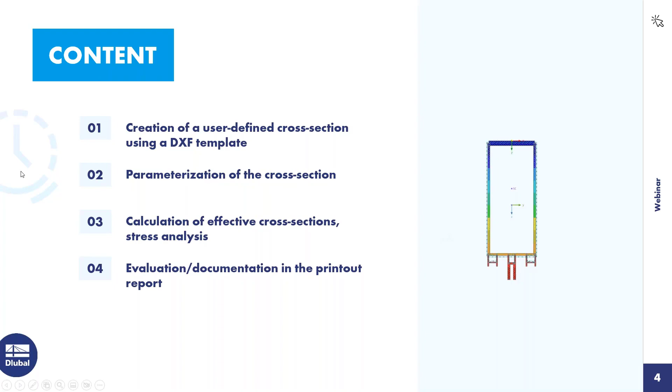The standalone program R Section determines the section properties for any thin-walled and massive cross-sections and performs a stress analysis. If you want to design special sections in RFEM or RStab that are not contained in the section library, you can create them with R Section.

You can then import these user-defined sections into RFEM or RStab.

Sections can be generated via graphical or tabular input, by importing a DXF file, or using a script. Furthermore, a parametric input is possible.

Today I will first show how to create a cross-section by importing a DXF file, and then I will parameterize the cross-section.

I import the DXF file via Import DXF. Here I have to choose the corresponding DXF file, and then I click on Open.

In this window I can specify the insertion point, or I can define a rotation, or it's also possible to do a system transformation.

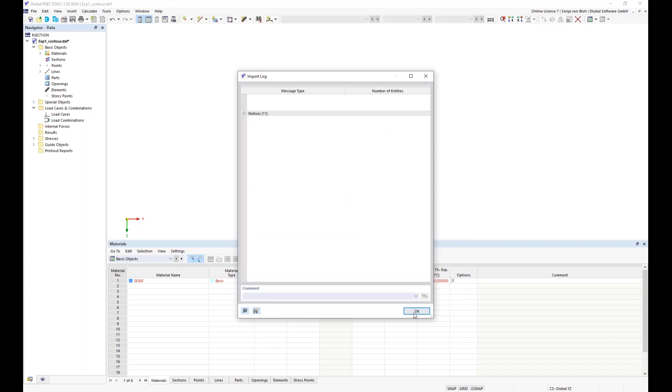And I click also OK, and then all lines will be imported.

Then I set the analysis method in the base data dialog. Here I open the base data dialog and I can choose the analysis method.

The following analysis methods are available: a finite element analysis and the thin-walled analysis.

The difference between the finite element calculation and the analysis of thin-walled structures is the calculation of the cross-section values and stresses on the gross cross-section. With the finite element calculation, the calculation is based on the FE method.

When analyzing thin-walled structures, the calculation is carried out analytically. The effective cross-section can be calculated for both analysis methods.

A license for the effective cross-section extension is required for this. The green dot here in front of the extension indicates that a license is present.

After activating the extension, a standard must be selected according to whose rules the subpanels are to be generated and the effective cross-section is to be calculated.

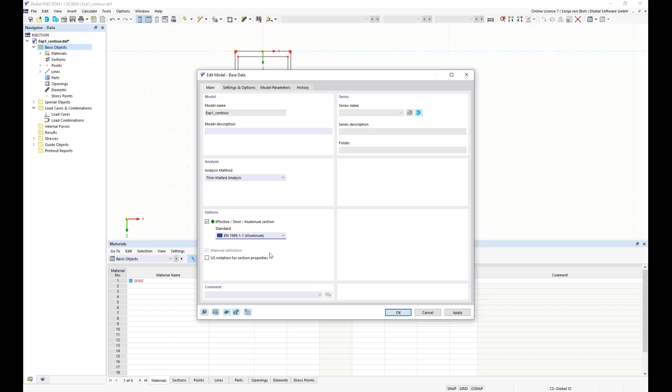I click here on OK, and then I have first to define the material. For this, I open the tree in the navigator: data, materials.

A material has already been created here. I double click this material to open the corresponding dialog.

I can create or copy another material on the list here on the left. These are the buttons for creation of a new material or copying the selected materials.

I can also delete the selected material. I can enter the name of the material directly in this box, and R Section then lists all materials that match that name.

If I enter the name here, you can see the corresponding materials.

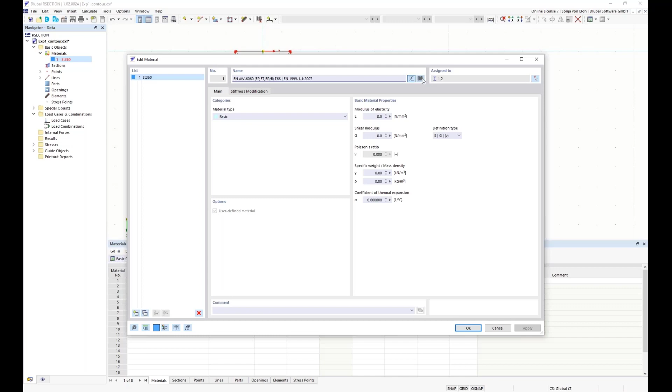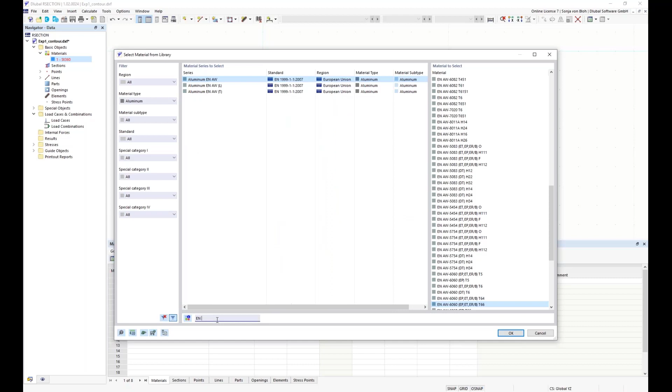I can also open the material library for a specific selection via this button. In the material library, filters are available to quickly find the material. I can choose the material type or subtype, the standard, and so on. But there's also a search available in this window. I can directly type in the name of the material.

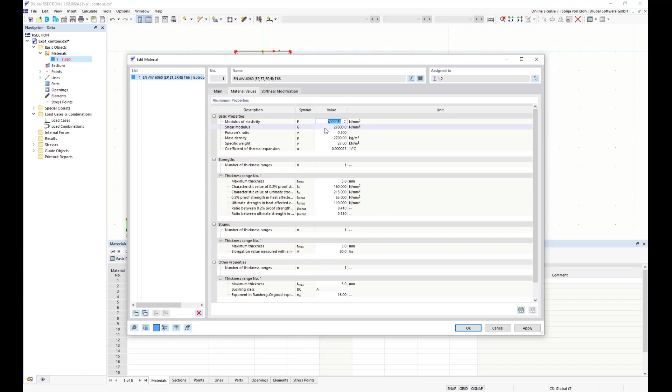I choose this material and click on OK. If the material is not in the material library, I can create it by activating this checkbox, user-defined material. If I now go to the tab material values, I can define the properties I want. I don't want to do this, so I uncheck this checkbox and click on OK.

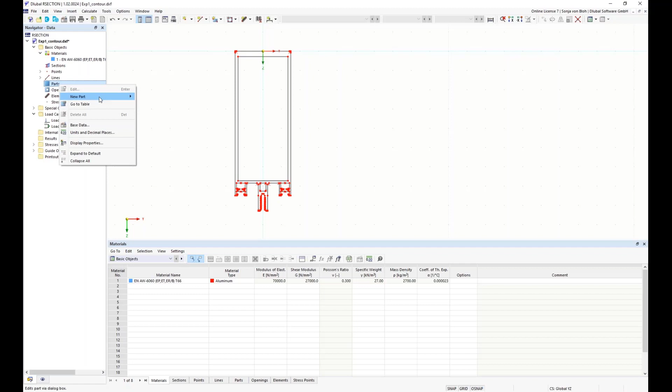After defining the material, a part must be defined for the cross-section. This part must be defined for all analysis methods. I create this part by selecting the boundary lines. For this, I go to the navigator data, then to a new part, boundary lines. Then I pick all lines, and then I want to deselect the openings.

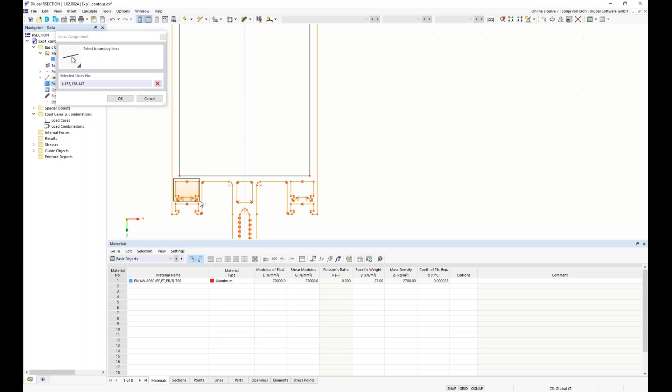I hold down the Shift key for this, and then I select the lines that I want to deselect. Then I click on OK. The material has already been defined here. Then I click on OK.

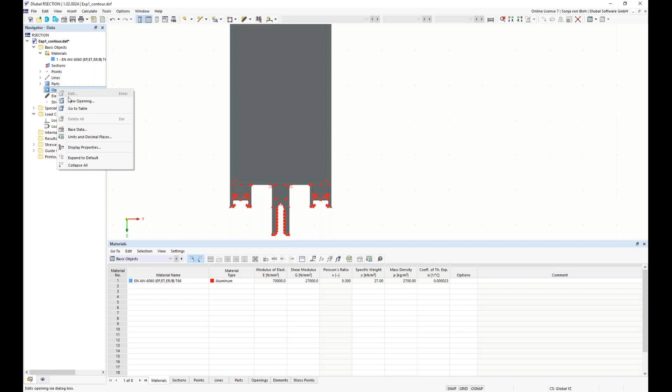After creating the part, I still need to create the openings. I will do this via the navigator data. For this, I right-click on openings and choose New Opening, and then I select the boundary lines.

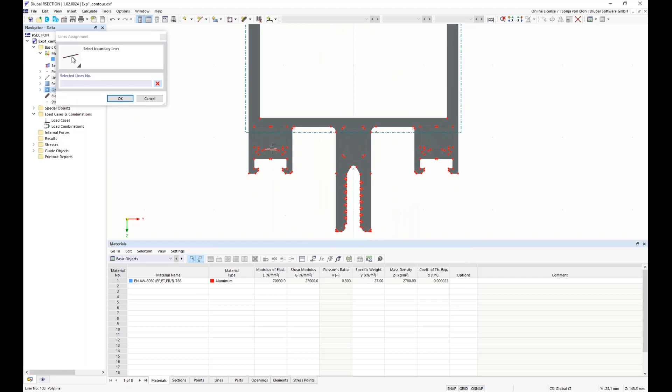I click on Apply and Next. Then I select the next boundary lines. Apply and Next. Next boundary lines, Apply and Next. And the last opening. Then I click on OK.

For calculation of the gross cross-sectional values using the finite element method, my entries would now be complete. However, I want to make a classification and calculate the effective cross-section, so I also need to define elements. The definition of elements is necessary since the subpanels are only available here. The definition is also necessary for the calculation with the analysis method thin-walled analysis.

Based on the elements, some cross-section values such as torsional moment of inertia and warping resistance are calculated if the analysis method thin-walled structures is selected. If finite element analysis is set, the gross cross-section values are calculated using the FE method.

The subpanels are automatically generated based on the standard selected in the base data dialog. These cannot be changed. If no elements are defined, a cross-section classification in RSECTION and the design models of RFEM or RStab is not possible, and it's also not possible to calculate the effective cross-section. In the design add-ons of RFEM or RStab, this cross-section is then designed according to cross-section class 3.

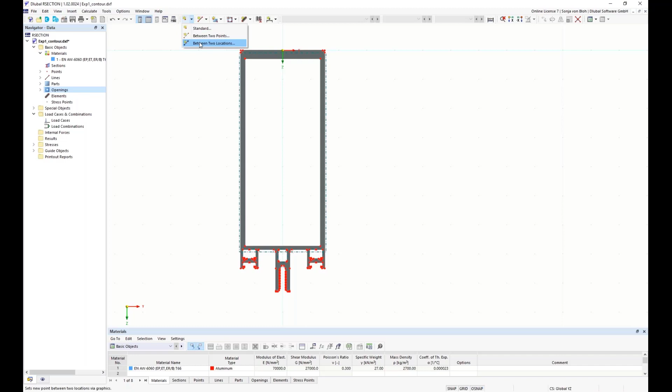I can now graphically create the start and end points of the elements, for example, using the function between two locations. For this, I select the first point and then the next point, and then I can define the distance between the two points. I don't want to do this today.

Because it's also a good idea to create the center lines in the CAD application and import them as a background layer. In contrast to the DXF import, in which the complete model is imported and converted into points and lines, the background layers represent a kind of layer for modeling.

For this, I open in Navigator Data the background layers. Here, a background layer is already imported. I delete this because I don't need it today. Then I go here to new background layer.

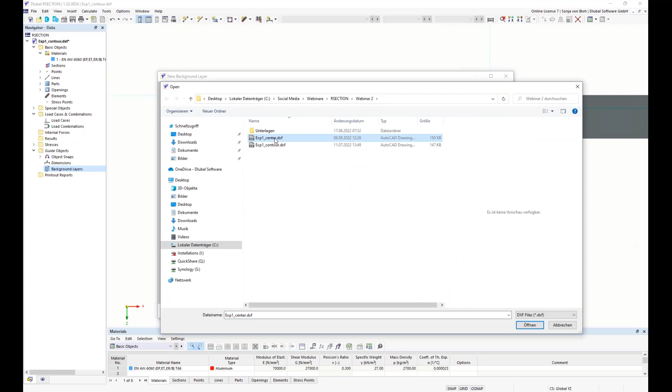Here I first select the DXF file to be imported via this button, Open File, and I choose the DXF file with the center lines. Then I click on Open, and the insertion point, this point here, determines where on the envelope of the background layer is placed at the origin point.

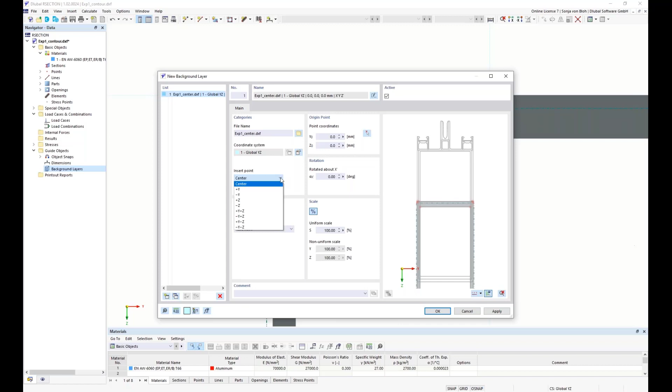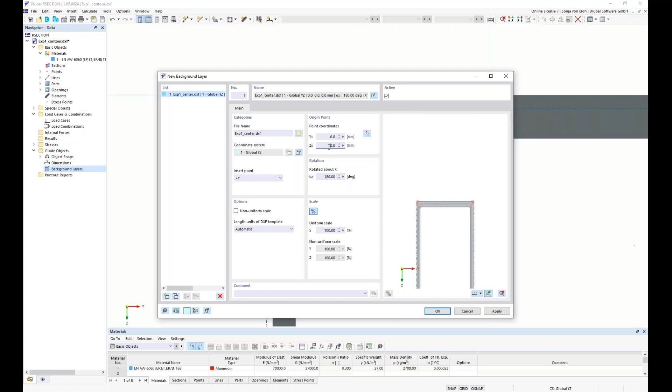I choose +Y here. Furthermore, I leave the origin at the 0 point here, and I define a rotation about 180 degrees. I see the result in the graphic here on the right, and then I click on OK.

Now the background layer is imported. Then I go to Object Snaps, and I want to control which options are activated. Here the options points, center lines, and focuses are activated. Points is already activated here, so that the start and end points of the center lines of the background layers are snapped. This is this checkbox.

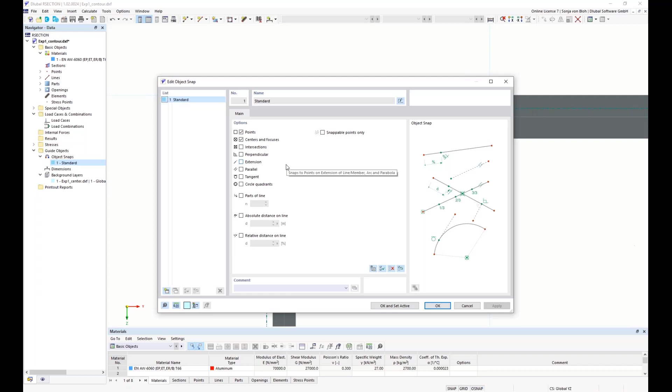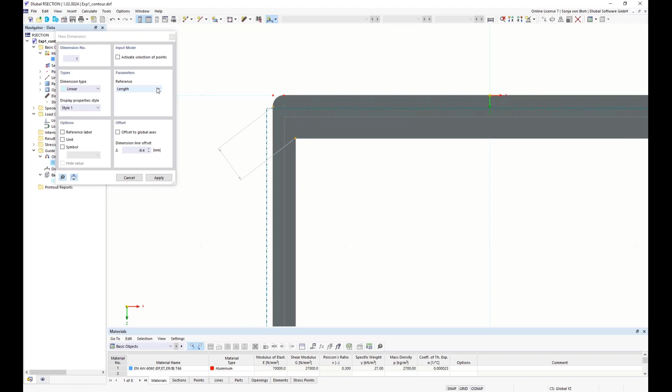I now dimension the cross-section to determine the element thicknesses. I can do this via the symbols here. We have several possibilities - I can do a linear dimension, arc length dimension, and so on. I choose here the linear dimension, and then I have to click or pick the points where I want to create the dimensions.

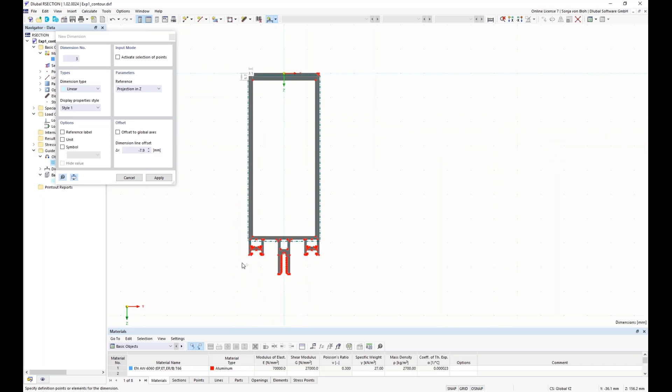I have to change the reference here to the Y direction, and I do this also here for the flange projection in Z direction. I need this also here, and the dimensions here.

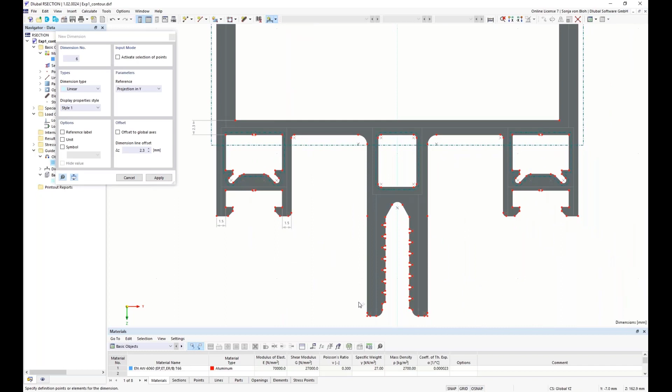And the dimensions here. I want to know which thickness is between the center point of the arc and this point here. For this, I create a help node. And then it's possible to make a dimension here.

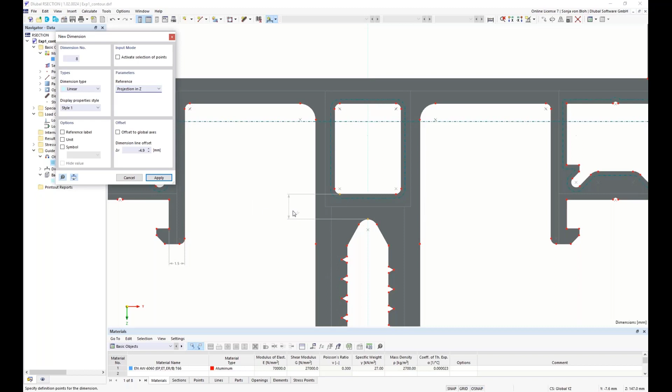I think now I have all thicknesses so that I can create the elements. The elements can be created graphically or via a dialog. The graphical input is called up via the symbol in the toolbar here. Here I have the possibility to define a single element, arc, or circle. The input via dialog is called up via the navigator data here, new element, single line, etc.

When creating an element via the graphical input, the part is also created. If an element is created in an already existing part, this part will be extended if necessary. When creating an element via the dialog, the part and the points of the element must be created beforehand.

Elements must be connected for the calculation of the effective cross-section. The connection is to be made via the start and end points of the elements. If two elements share the same points, they are connected.

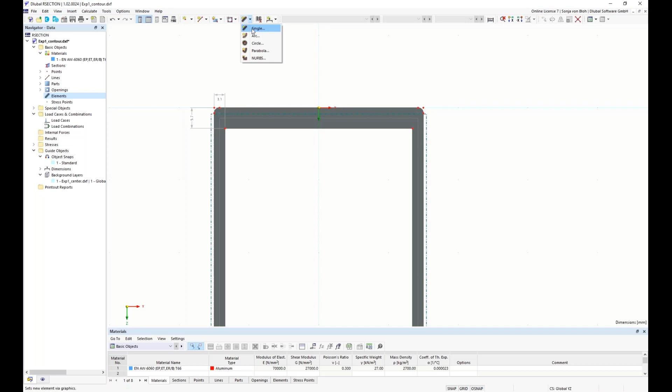I now define the elements via the graphical input, so I choose here this function single. Then I define the thickness 5.7 millimeters, and I pick the points on my background layer.

Then I define the elements for the web. The web has a thickness of 3.1 millimeter. Same on the other side.

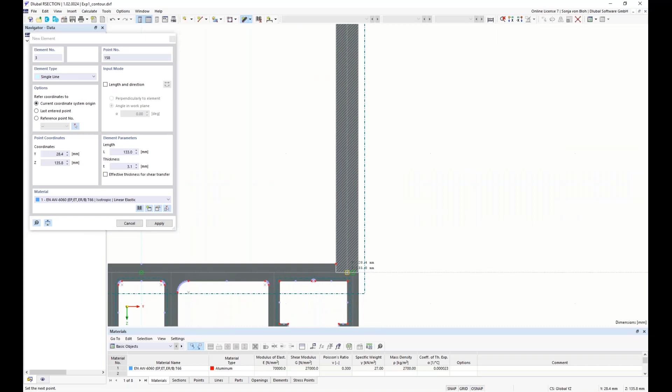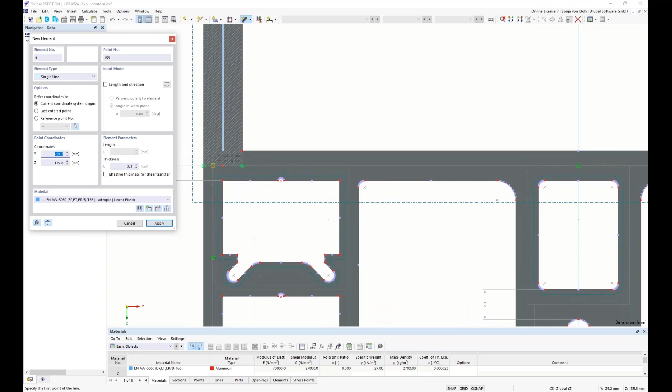Then I define the elements here on the flange. They have a thickness of 2.3 millimeters. I pick the corresponding points.

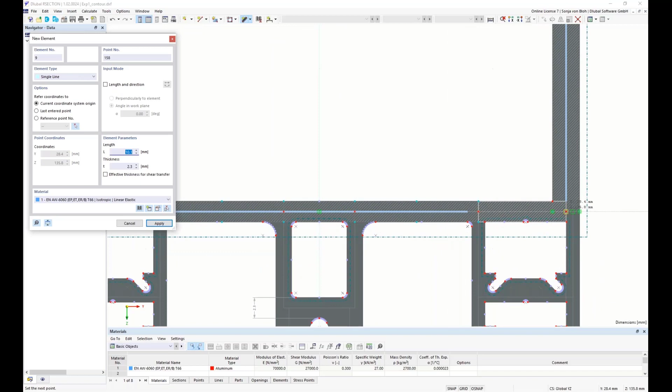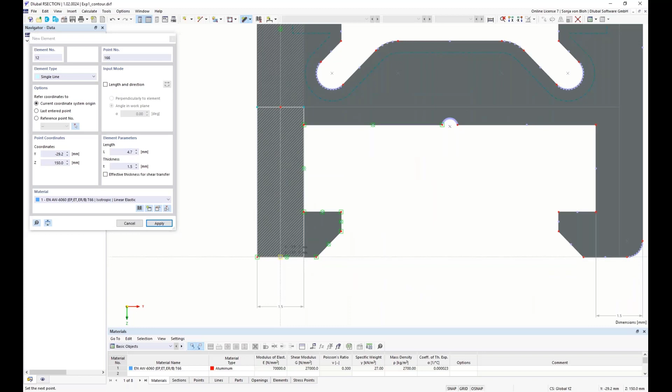Then I have to create the elements here. They have a thickness of 1.5 millimeter. Same on the right side of the cross section.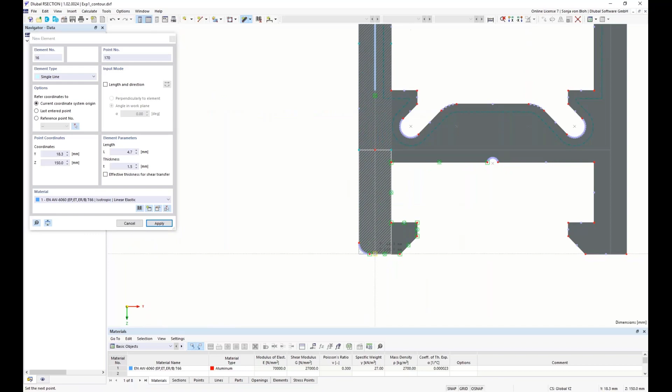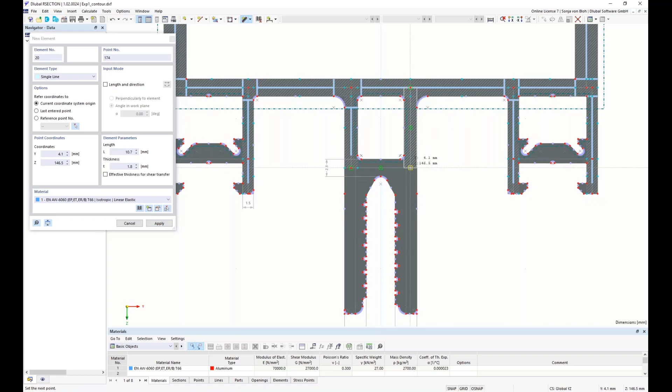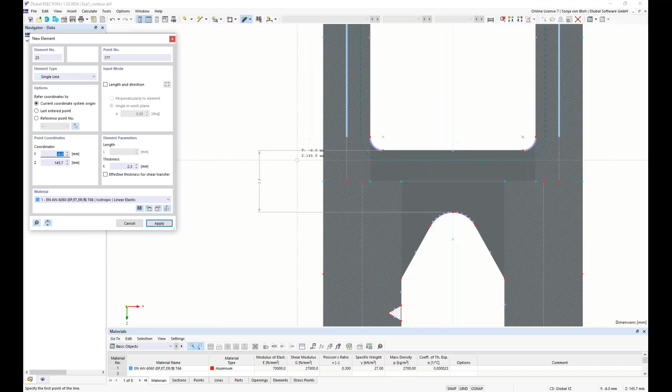Then I create the elements here in the middle. Then the connecting element here. And then the elements here.

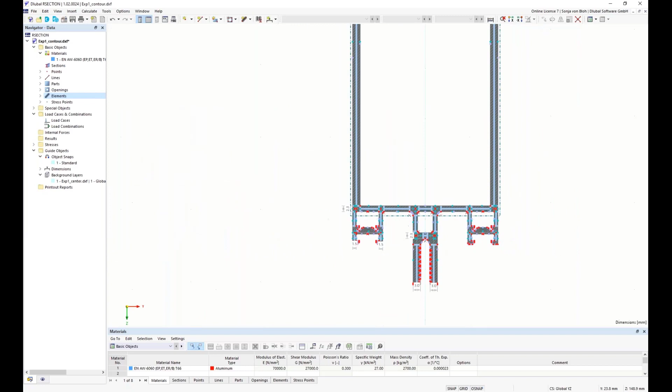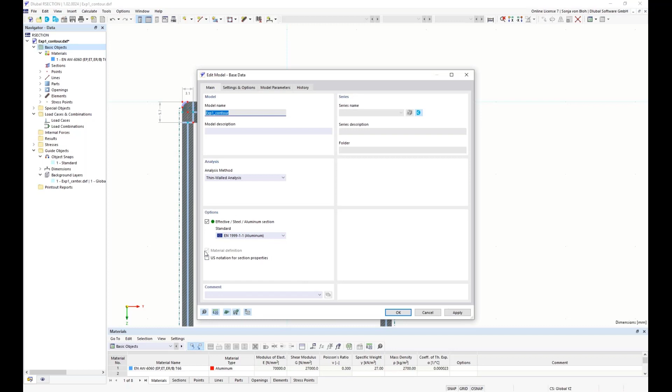The cross section is now complete. You can see the subpanels here that were automatically generated according to the rules of the standard that I have chosen in the base data dialog. Here it's a standard Eurocode 9.

If this cross section is available in different dimensions, a parametric input is recommended. The parameterized input makes it possible to enter model data and internal forces in such a way that they depend on certain variables. These variables, such as length, width, or thickness, are called parameters.

The cross section is in different heights, so I want to parameterize the height. The parameters can be defined in the global parameters, and I can open the dialog via the table, here clicking on the symbol edit global parameters.

First, I have to specify the name of the parameter in this cell. The name of a parameter must consist of ASCII characters and no spaces. The parameter is addressed in the formulas via the name, and each name may only be assigned once.

I create a parameter called h1. This is for the height of the cross section. Then I have to define the unit group, and the unit group of the parameter determines whether the parameter represents a length, thickness, angle, etc.

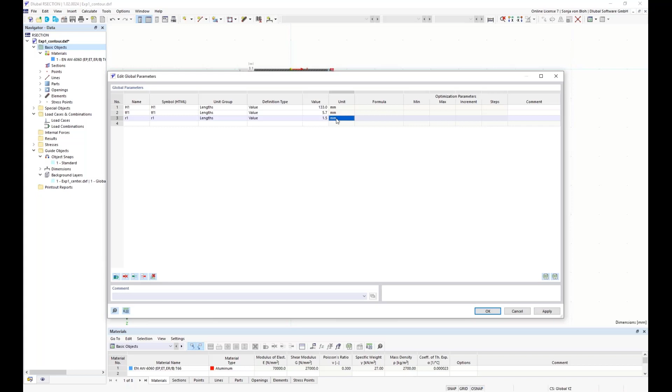Then I define the next parameter for the flange thickness. I call this parameter TF1, and I define the value 5.7 millimeters for it. Then I define the next parameter. I call it R1. This is for the radius, and I define the value 1.5 millimeter. Okay. Then I click on OK.

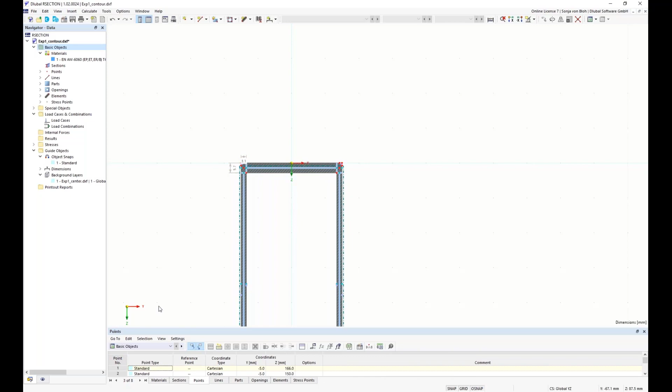I then define the coordinates of the top area using my parameters. The top area is this here. And for this, I go to the table points.

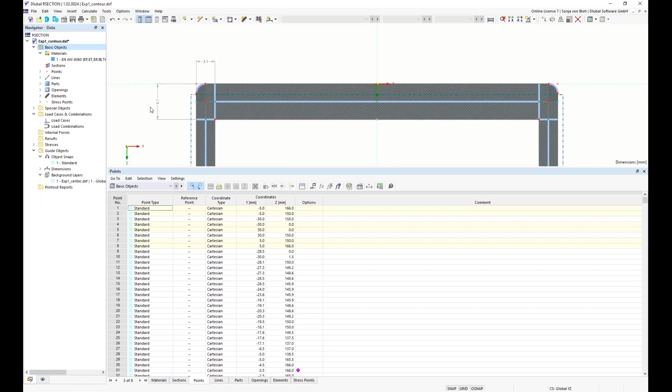I see here I don't need this point. This point is not needed, so I can delete them. I go to Edit, select 3 points, and then I click on Delete.

And now I want to parameterize all these points, so I select them, and then I go to this table function selected objects only, so that only my selected objects will be displayed.

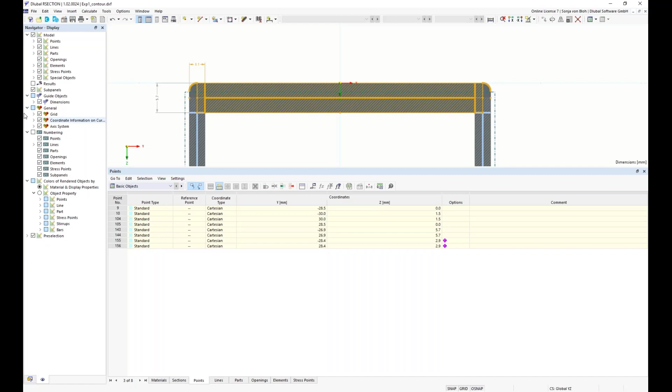I turn on also the numeration, or the numbering, of the points.

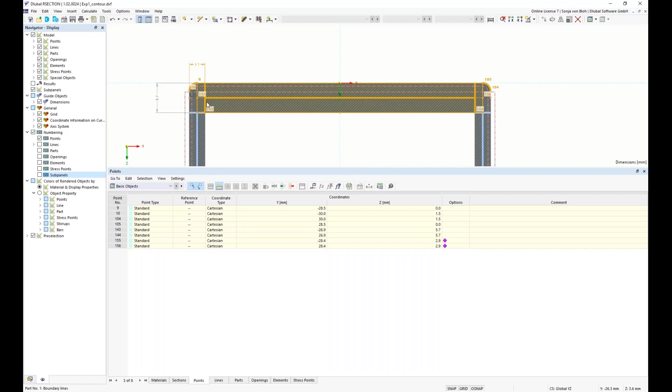And you have the option of addressing objects and their properties directly. For example, I can access the coordinates of points. If I want to access the coordinate of the point here, of the point 157, then I have to define this via the properties.

A list of the properties can be opened via the menu View and then Console. And then here, if I click on the info button, then I see all object properties. Here I have the object property points, and the property coordinate 1 is for the y coordinate of the point, and the point I have to specify in these brackets. The coordinate 2 is for the z coordinate of the points that I have to specify in these brackets.

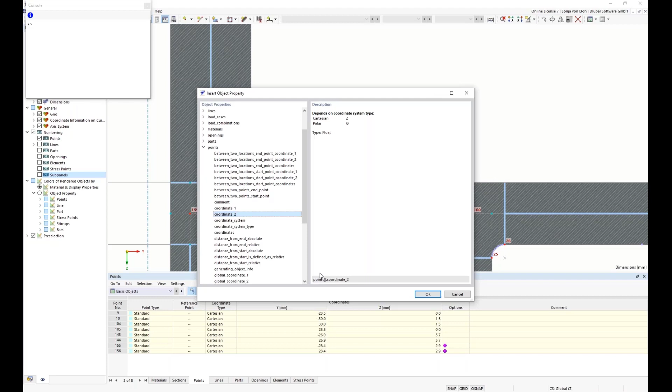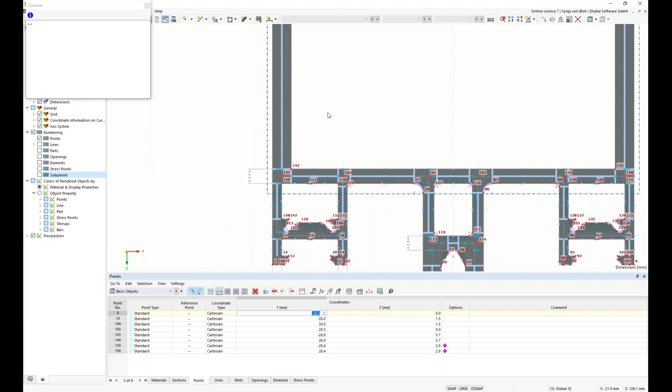I now define the coordinates depending on my parameters. I can do this directly in the table. For this, I want to define the y-coordinate of my point number 9. This is my point number 9. I type in equal points 10 dot coordinate 1, so it's the y-coordinate of my point number 10, plus my global parameter R1 for the radius.

I can show the formulas via this button, and it's also possible to define the parameters or the formulas in an additional window, in the Edit Formula window.

Here I define the z-coordinate of my point number 9. This is the z-coordinate of my point number 157. So points 157 dot coordinate 2, for the z-coordinate, minus H1 minus TF1 divided by 2.

Here I see the result. Then I click on OK. It's also possible to copy the formula.

So I open the dialog again, and then I copy this formula because I need it for the definition of my point number 10. For this, I open the Edit Formula window again. Then I paste this formula, and it's the same, but additionally plus R1.

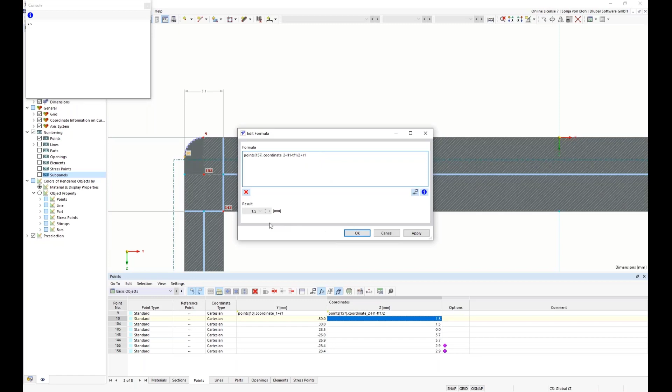Then I define the z-coordinate of my point number 104. For this, I open the Edit Formula window again, and this is also plus R1.

I do the same for point number 105. This is the y-coordinate from my point 104, minus R1.

And this is points 157, the z-coordinate minus H1 minus TF1 divided by 2.

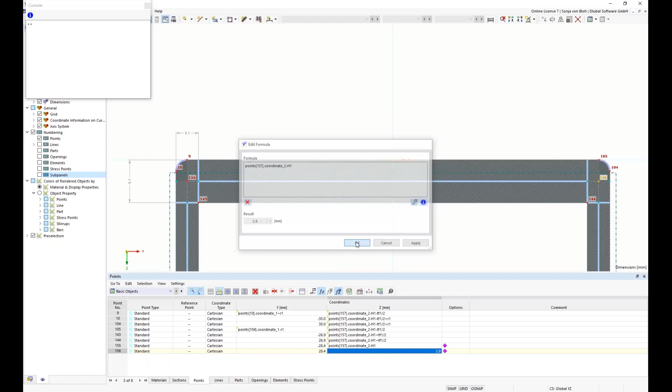Now I have to parametrically define the control points of my arcs, these arcs here on the left and on the right. For this, I open the Edit Line dialog via double-clicking on the arc, and then I can define the control point.

For this, I open the Edit Formula window of the y-coordinate of my control point. Here it's points 9, coordinate 1, minus R1 divided by square root of 2.

I copy this formula, click on OK. Then I have to define the Z coordinate. For this, I open the Edit Formula dialog again. This is the Z coordinate of points 10, so I have to change it here: Z coordinate minus R1 divided by square root 2.

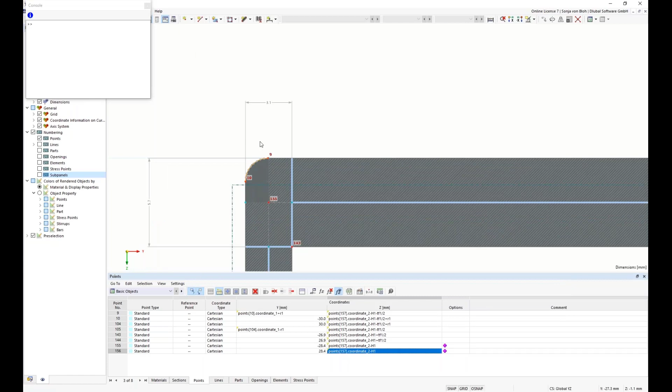I have to do the same for the arc on the right side. So I double click on this line, open the Edit Formula dialog, and I paste the formula. It's the y-coordinate of point number 105 plus R1 divided by square root 2.

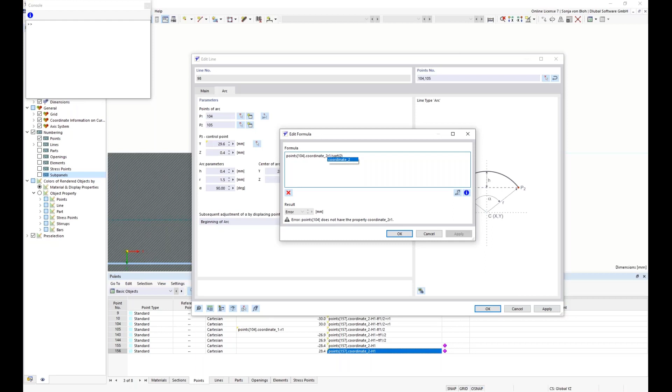And this is the Z coordinate of point 104 minus R1. Then I click on OK.

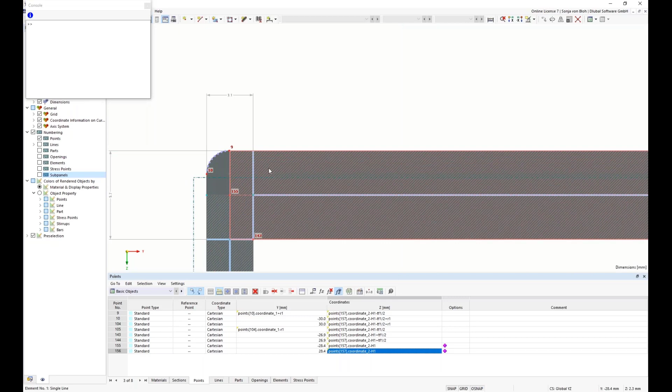The thickness of the element must also be defined with a parameter. So I open the Edit Element dialog, and here I define the parameter for the thickness. For this, I open the Edit Formula window again and define here TF1.

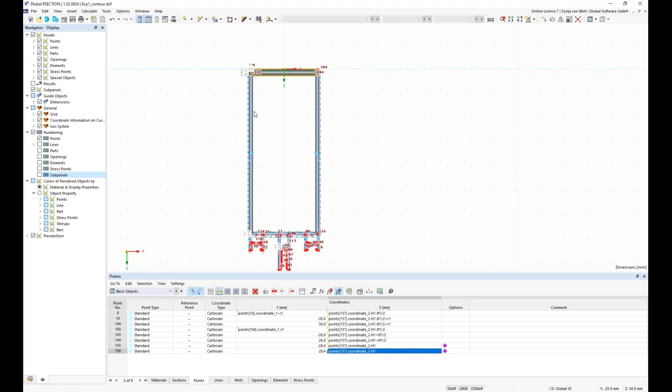Now I've defined all parameters, and for control purposes, I measure the height. For this, I create a linear dimension between the points 155 and 157.

You can also add a dimension symbol if you activate the checkbox symbol, and you can also use HTML commands and special characters called entities. A subscript is achieved with a sub-text tag. So if I want to define H and then 1 in subscript, it's sub, 1, and then the end tag.

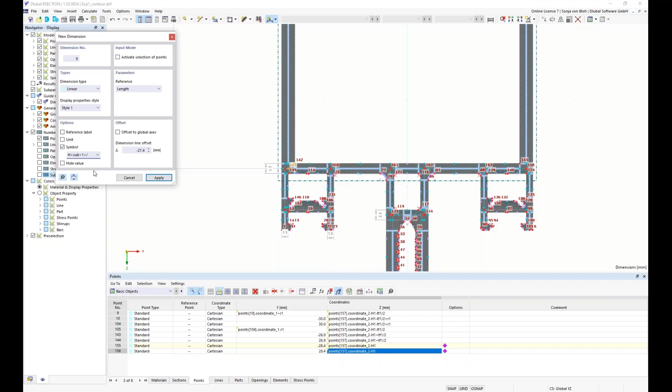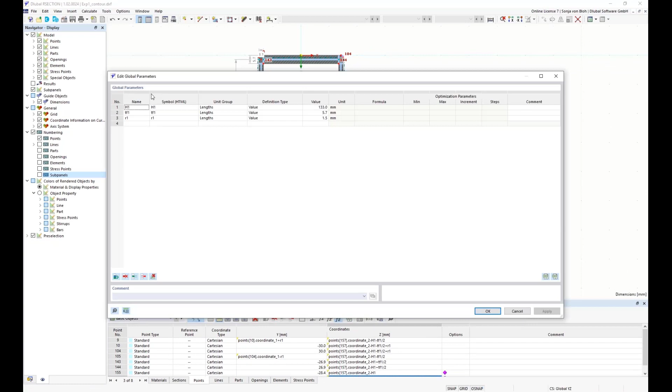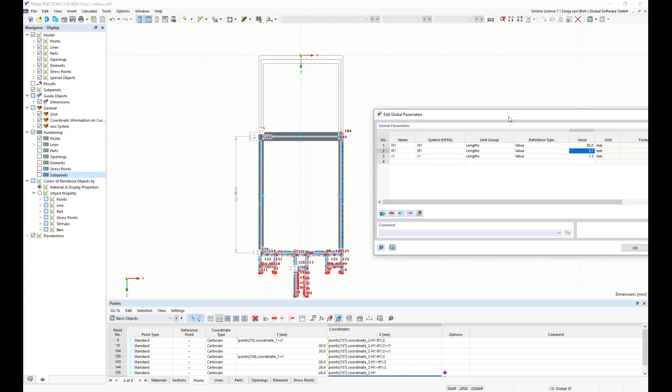Then I will show you the parameterization. For this, I change my parameters. Maybe here I change the height H1 to 80 millimeters, and if I click on apply, you can see the result. I change it back to 133 millimeters and click on OK.

I would also like to use this example to show you how to calculate stresses on the effective cross-section. In order to calculate stresses on the effective cross-section, a load case must be created first. A load combination can also be created.

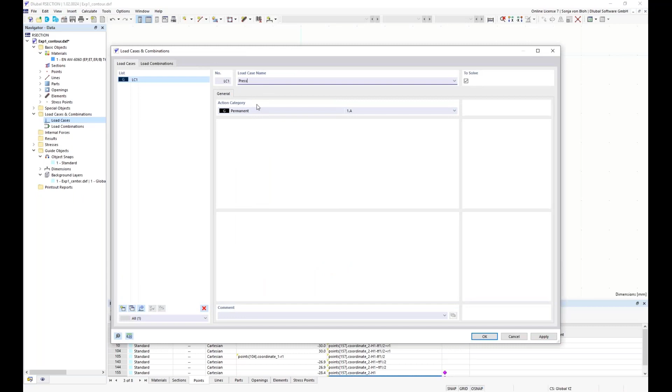I create a load case via the navigator data. For this, I right-click on the load case and choose new load case. I define the name pressure, and then I click on OK.

Then I have to define internal forces. I can do this via the navigator data, or via the table. If I choose internal forces here, it's possible to define them manually. It's also possible to import the internal forces from RFEM or RStab via this button. Only import from RStab 9 or RFEM 6 is possible, and the file must be saved with results for this.

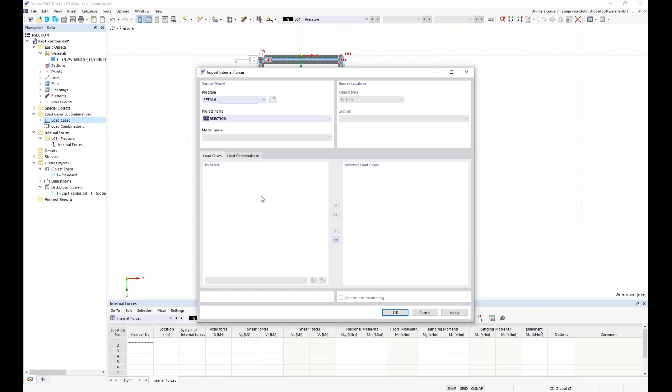A load combination is supported as a load case. I don't want to import internal forces today from RStab or RFEM, I want to define them manually in the table. For this, I have to enter the member number and the location, and then I define an axial force, pressure minus 2 kilonewton.

In the base data, I can make detailed settings. So I open the base data dialog again, and then I go to the tab settings and options. Here I can define if the stresses for elements should be determined at the most unfavorable element edges or on element center lines only.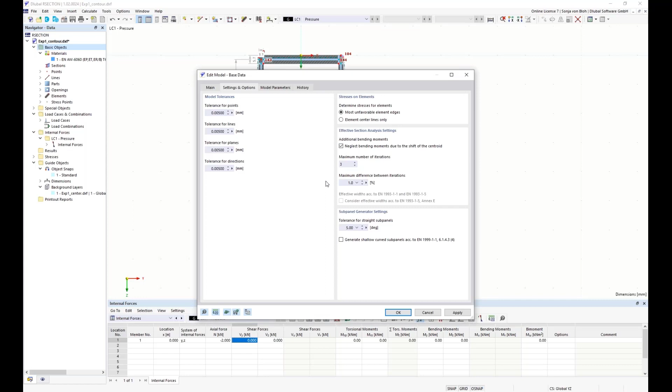Here it's also possible that an additional acting bending moment, that results from the shift of the centroid of the effective cross-section relative to the centroid of the cross-section, should be neglected. So I activate this checkbox, and then I click on OK.

Which stresses are to be calculated and output in tabular and graphical form can be set in the data navigator. Here under stresses, stress configuration, I open the corresponding window, and here you can activate or deactivate the stresses that should be calculated. Here the stresses sigma x total and tau total are activated.

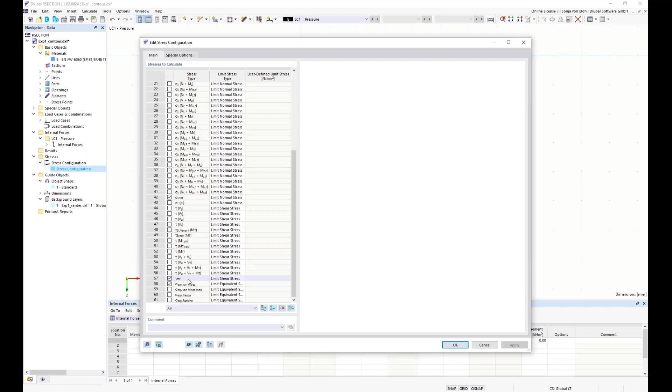This is okay, and then click on OK. Then I'll start the calculation now. So I go to calculate, calculate all.

And in the table, you have the results for the gross cross-section. This is the thin-walled analysis, the sectional area for the gross cross-section, and you can switch here to the effective thin-walled analysis. Then the sectional area of the effective cross-section will be displayed. This is less than the gross cross-section, so I assume this cross-section has class 4.

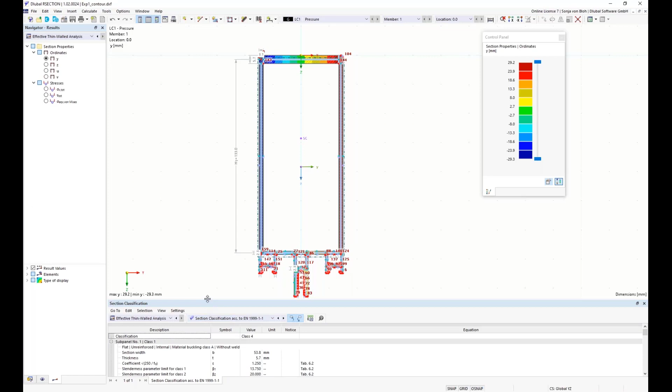You can see this also in additional tables. Here you can choose the section classification, and I can see, okay, this is class 4, and the subpanel number 2 is class 4. This is also selected here in the graphic.

I can switch also the graphical results to a thin-walled analysis. This is for the gross cross section here, sigma x total, and I can see here also the effective cross section, and I can see, okay, the web is reduced, and if I want to know the reduction, then I can go to the corresponding table.

Here, reduced thicknesses. I click on the corresponding subpanel, and I see the effective thickness is here 2.4 millimeters.

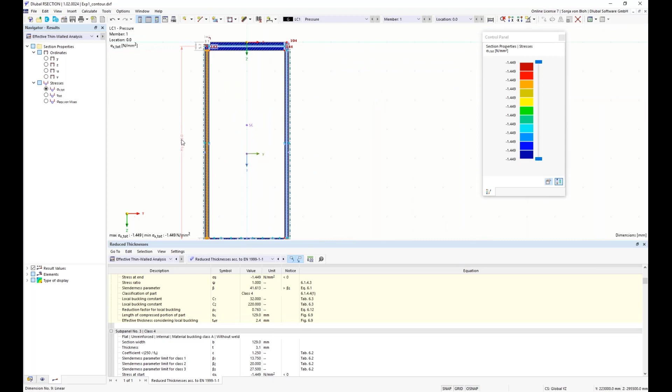I can also set the display type in the navigator results. Here I can choose between ISO bands or ISO lines, and here I can choose the option off.

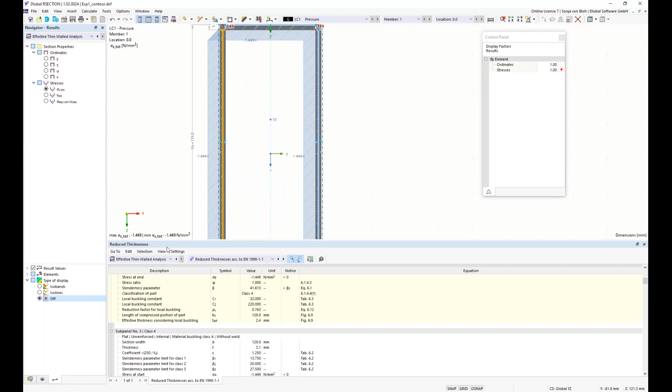And finally, I would like to show you the documentation. The printout report is structured in the same way as an RFEM 6 or RSTAB 9. You can create a new printout report using the data navigator. So I switch to the navigator data, and then I right-click on the printout report and choose the option New Printout Report. Then the Printout Report Manager opens, and here I can activate the report items that I want to print in the printout report.

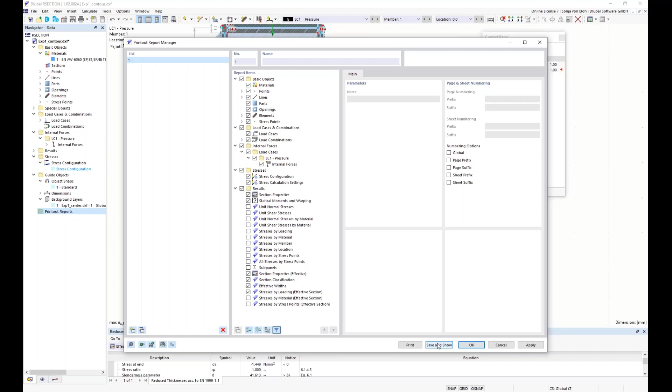Here I deactivate the unit stresses of the gross cross section. And if I click on Save and Show, then this opens the printout report.

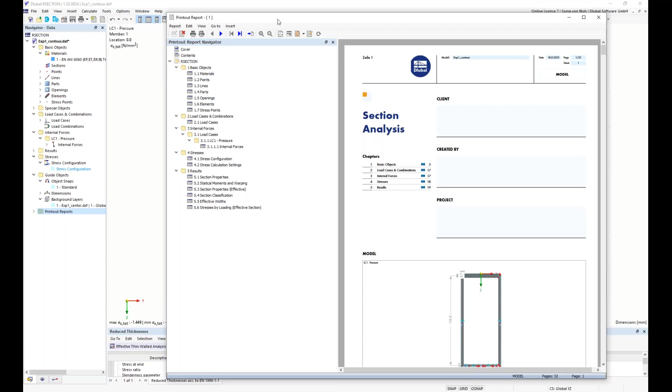And this opens my printout report. Here I have all tables that I have selected before. It's also possible to print a graphic to the printout report.

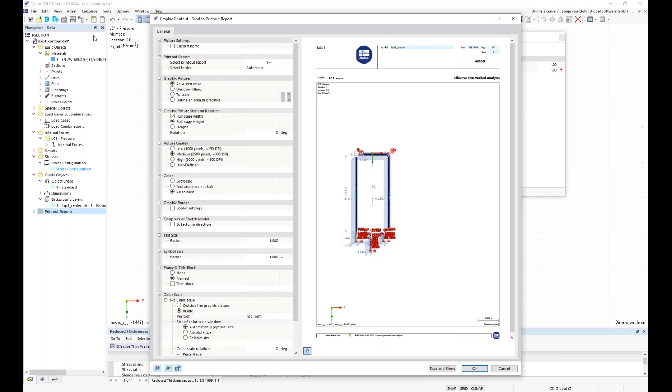For this, I go back to our section, and then I choose print graphics to printout report. And here I can define the graphic pictures. This should be window filling. Then I go to Save and Show, and then this graphic will be printed to the printout report.

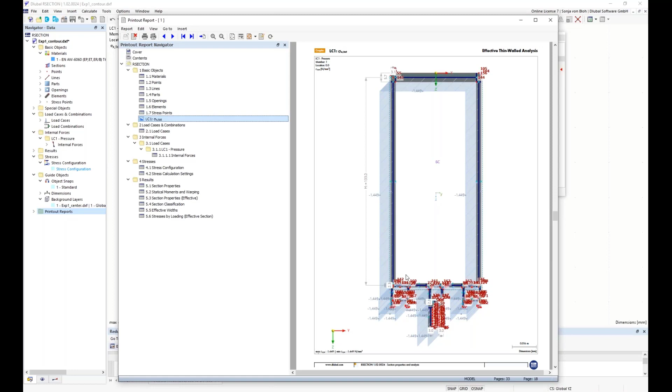If I don't want to have the numbering, I can go to Edit, and then I can deactivate the numbering, go to OK, and the graphic will be changed.

With the presentation of the documentation, I've now come to the end of my presentation. I will now give the floor back to Andreas.